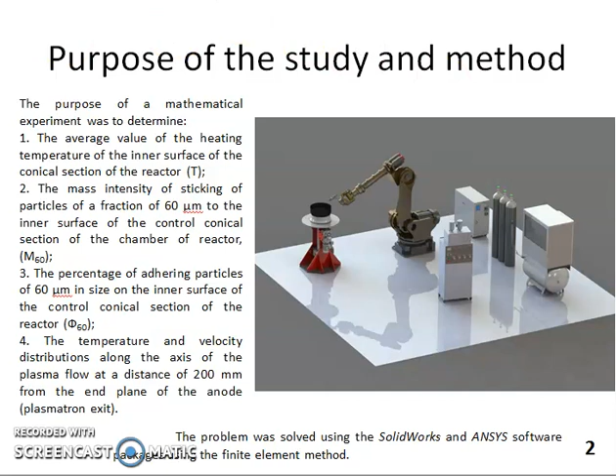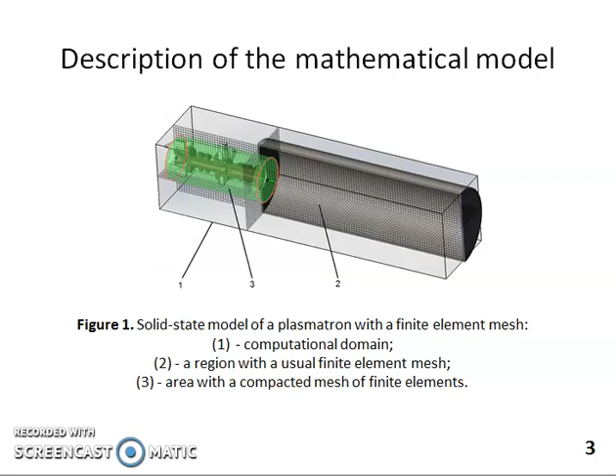The monitor shows the calculation area with grid. In the narrow places where very high accuracy was required, areas with increased density and smaller mesh size were used. The element size was selected at which sufficient accuracy and acceptable calculation time on the computer are ensured. In this article, a tolerance of the average volume temperature of ±2 Kelvin was accepted.

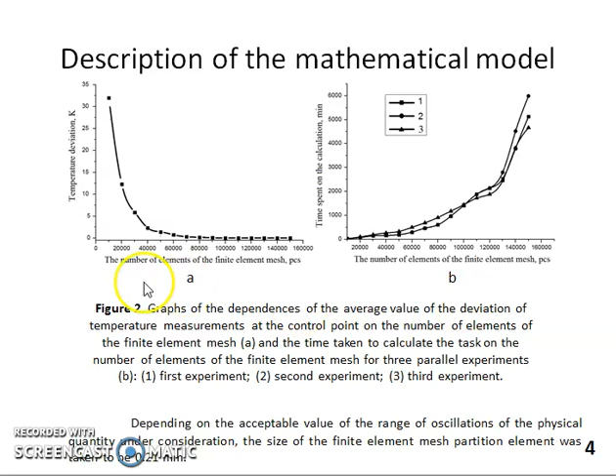The following were taken as input data for calculation. Gas type is argon. Gas volumetric rate is 15 liters per minute. Plasma forming gas pressure 1.5 atmospheres. The plasma temperature is 7000 Kelvin.

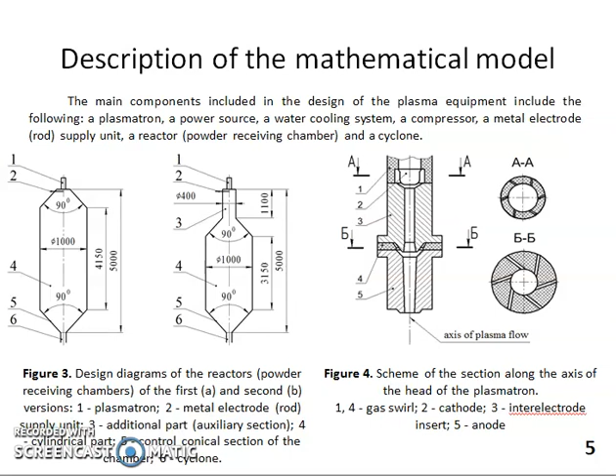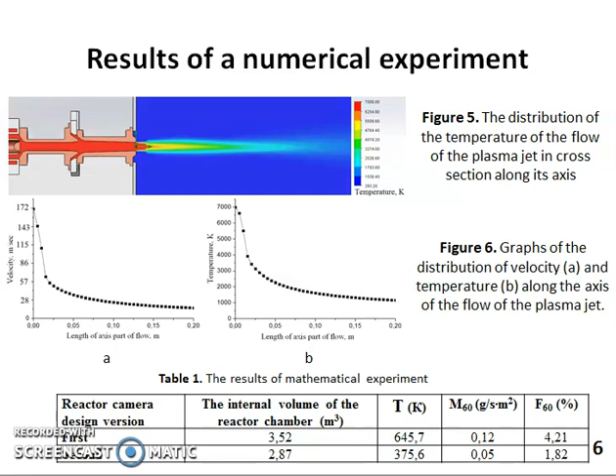Figure 5 shows the cross section. The maximum volume temperature of the plasma jet is reached when approaching the flow axis. The results are presented in Table 1 and Figure 6. As a result of analysis of the data presented, it was concluded that it is more efficient to use the second type reactor. In order to verify the result of the mathematical experiment, we conducted a full-scale experiment.

The purpose of the full-scale experiment was to determine the temperature of the plasma jet, allowing subsequent comparison of the obtained data with results of the computer experiment. For this, rods with a diameter of 3 mm were selected from materials with different melting points. The rods were alternately placed in the manipulator perpendicular to the axis of the plasma jet flow, so that one end of the rod was on the axis and the other was clamped in the manipulator. The manipulator was located at a distance of half a meter from the plasmatron.

Next, the manipulator with the rod mounted in it gradually moved at a constant speed of 50 mm per minute, parallel to the axis of the plasma flow toward the plasmatron. The distance from the rod to the end of the anode was recorded. An optical pyrometer was used, which recorded the surface temperature of the free end of the rod. At the moment when melting began on the surface of the rod, data were taken from the pyrometer scale, and the distance from rod to plasmatron was recorded.

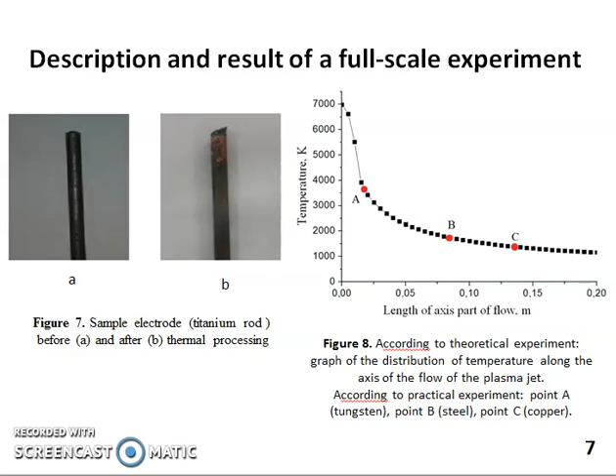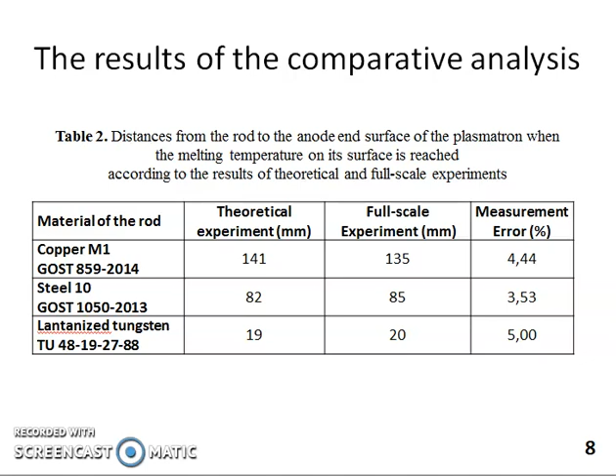Figure 8 shows the overlay of the theoretical curve on the data obtained from the full-scale experiment. The result of comparative analysis shows satisfactory convergence. 5 aspects should be noted as the main result.